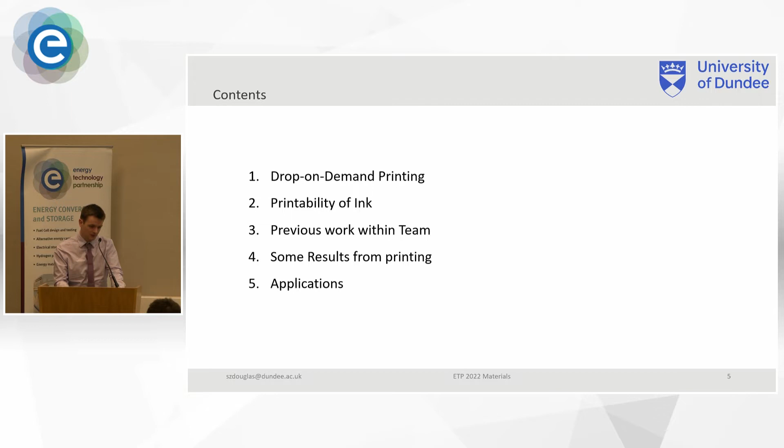It's a camera that lets us see the nozzles on the cartridge, and on the cartridge there are 16 piezoelectric nozzles. Through this camera we can see which ones are working. Some can get blocked, some can not jet correctly, so when we see the droplets, we want to make sure they're going in a straight line.

Not off at angles. We also want to make sure the velocity is within an optimized zone of about 6 to 9 meters per second, and we can change that speed by changing the voltage applied to each nozzle.

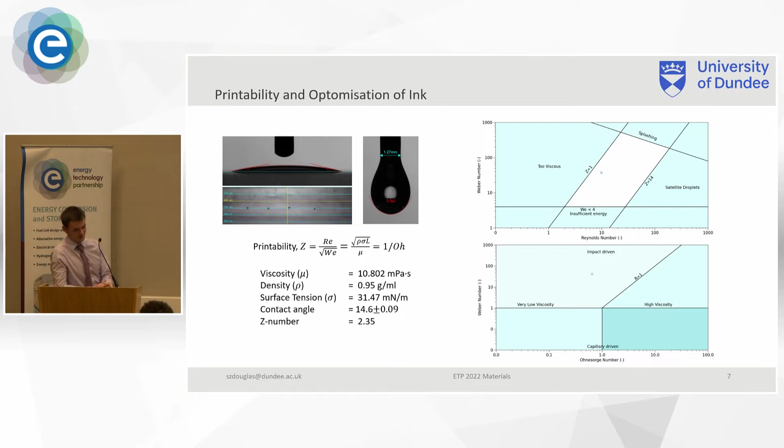This ink was previously optimized by a previous PhD student. He optimized it by creating blank inks, which is the solvent without any platinum, that behaves the exact same way. He created blank inks with different concentrations of a viscosity additive to change the viscosity of the ink, then printed it and watched what ranges of nozzle voltages you could print within, and the temperature at a single nozzle voltage to determine which concentration was the most optimum.

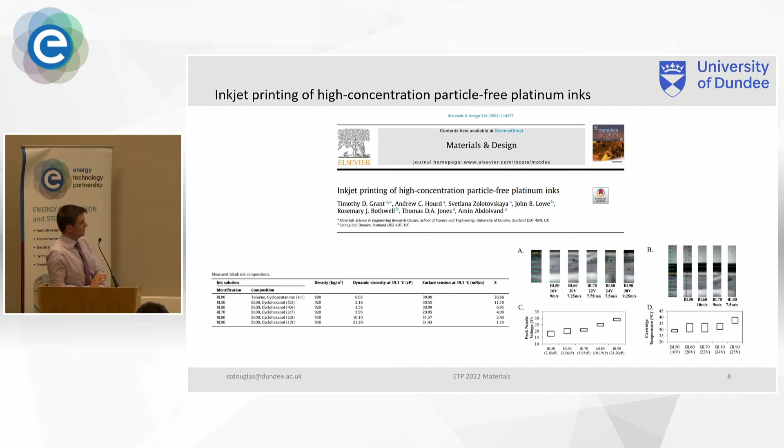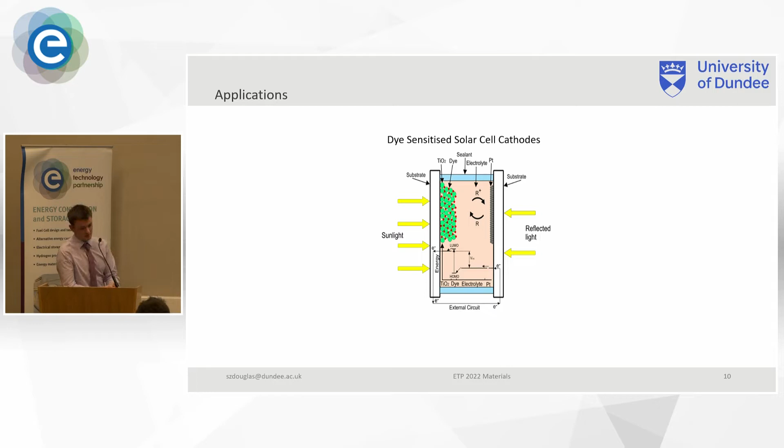The platinum acts as a catalyst to the reaction to transfer the electrons back to the electrolyte, which then reduces the oxidized dye molecules back to its original state, so we can restart the solution, the reaction, the system. So there's a few things I'm looking at with the platinum in terms of the thickness, how the thickness will affect this reaction, and also the porosity. As we saw in the previous slide, when we increase the porosity, we reduce the conductivity, but we could also potentially increase the reaction rate with the electrolyte. So it's an interesting thing I'm going to be having a look at.

I think I might have been a bit quick, but that's it. Talked a bit quicker than I thought.

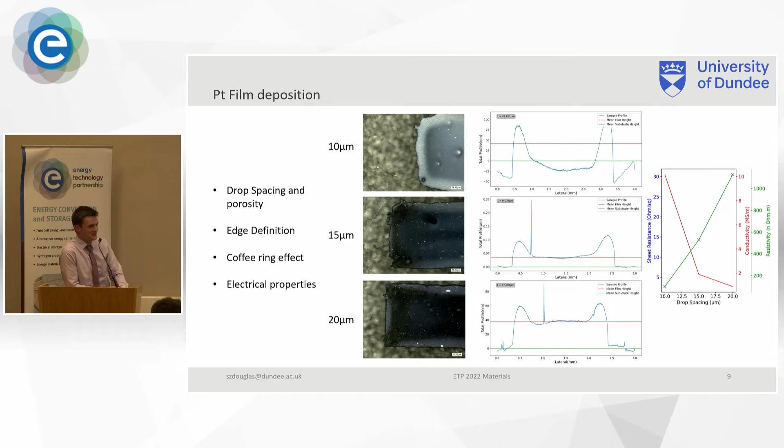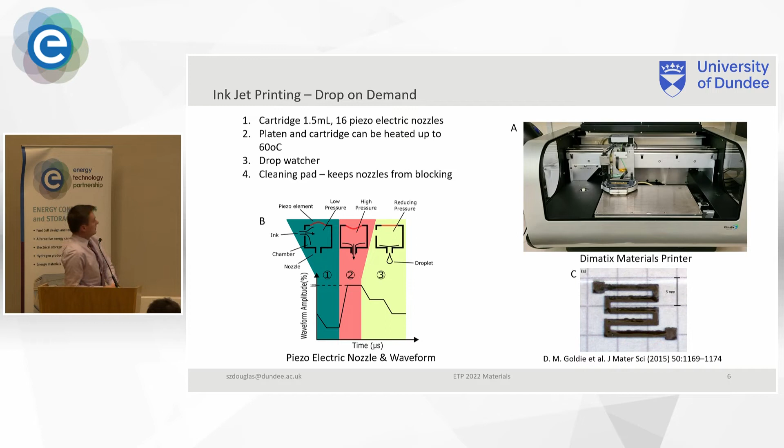You mentioned voltage and piezoelectric. What does that mean, and how are they related to print speed and droplet speed? The voltage applied to the piezo element controls the force and pressure applied to the droplet and the ink within the nozzle. In this waveform process, you reduce it to zero, creating low pressure that draws ink into the nozzle, then ramp the voltage up to 100%, set dependent on the velocity you measure afterward, which pushes the ink out at that velocity.

What happens to the piezo material when you apply a voltage across it? It relaxes, you can see like a red line. So you're changing the volume of the internal cavity, creating low pressure to draw ink in, then ramping it up to high pressure to push it out.

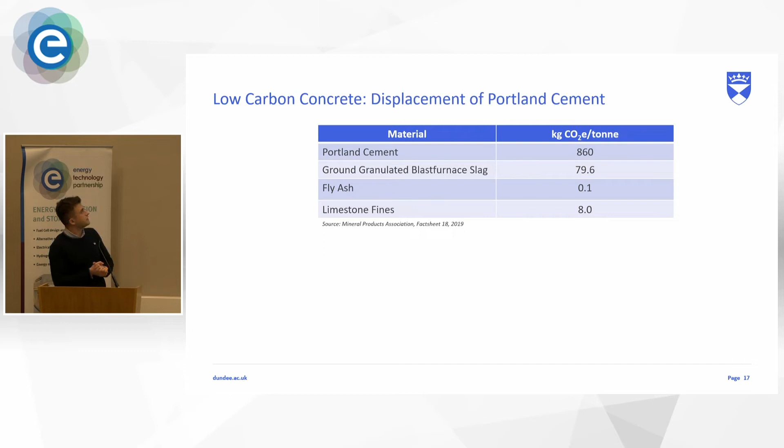Then we have low carbon alternatives of cementitious materials: ground granulated blast furnace slag, or GGBS for short, fly ash, and limestone fines, which are all essentially waste byproducts of steel production, coal-fired power stations, and limestone processing respectively. Therefore the CO2 footprint associated with these materials is quite low, because it's associated with the actual primary product rather than the waste byproduct.

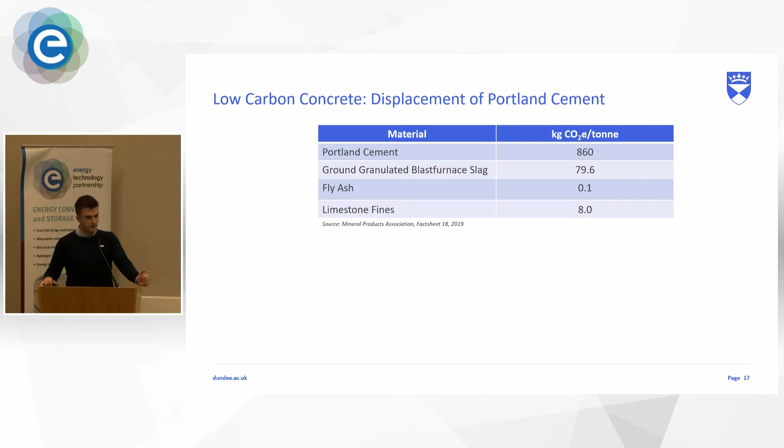But what do we consider to be a low-carbon concrete? A conventional concrete would look something like 85% Portland cement with a little addition of 15% limestone, so technically anything below 85% could be argued to be low-carbon concrete. In this project, we tried to go as low as reasonably possible without compromising performance and durability, and ended up pushing PC replacement up to 50 or even 60% with GGBS, limestone, and/or fly ash.

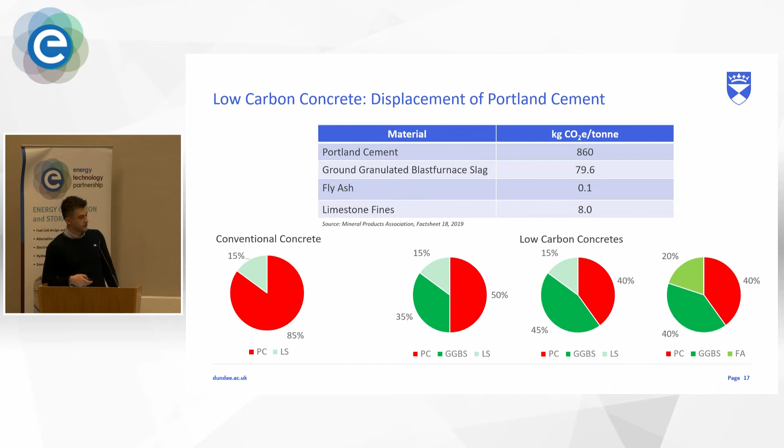In conventional concrete, after being cast, it requires at least 28 days of curing at 20 degrees Celsius to reach its full maturity.

When it comes to low-carbon concrete, as we just said, it utilizes low-carbon cement alternatives, often referred to as slowly reacting cements, due to the fact that instead of 28 days, now they need 90 days to reach full maturity. So this is particularly an issue with the so-called pre-construction concrete testing phase of a project.

When we have got a project, before we use it in situ, we have to test it in labs for particular environmental exposures. So the typical time frame would be 28 days for the sample to mature, plus the required time for the given test to be performed.

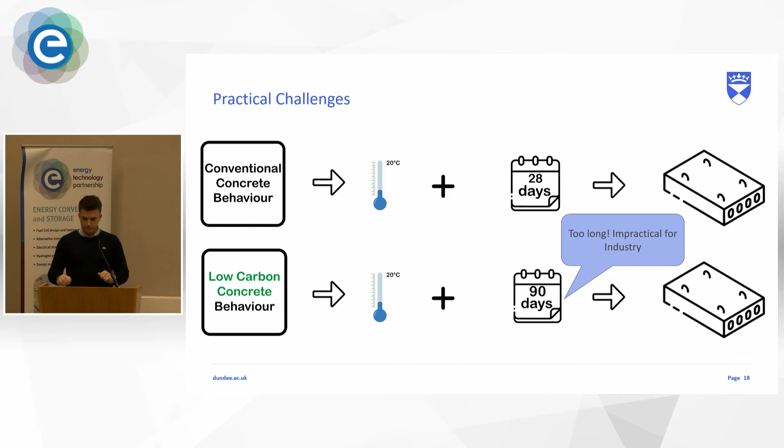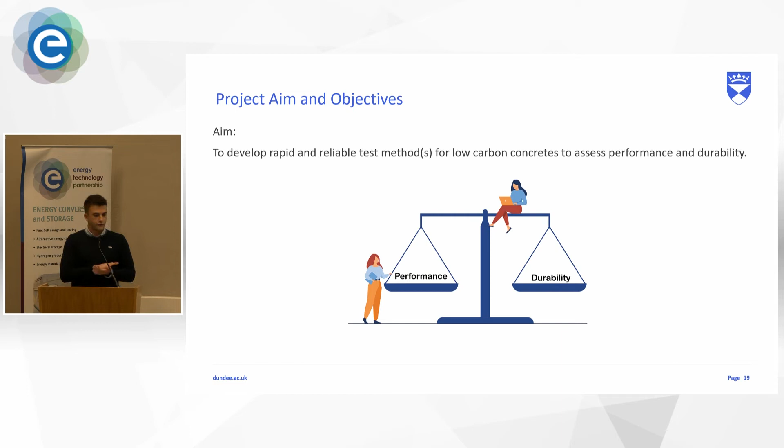So what if we came up with a method of trying to accelerate, to minimize that 90-day period to the minimum? Essentially trying to accelerate the maturity process without compromising performance or durability. That research question evolved into the aim of this project, which is to develop a rapid and reliable test method, or methods, for low-carbon concretes to assess performance and durability.

One of the ways of accelerating the maturity of concrete would be to increase the temperature of curing. This is not a new concept. Precasters have been doing that for ages. What we've done is decided to put a spin on it.

Essentially, for the first 3 days, we cured it at 20 degrees to let the initial chemical reactions happen, and then we put the samples in 50 degrees Celsius for X number of days to essentially match the strength of the 90-day standard cured samples.

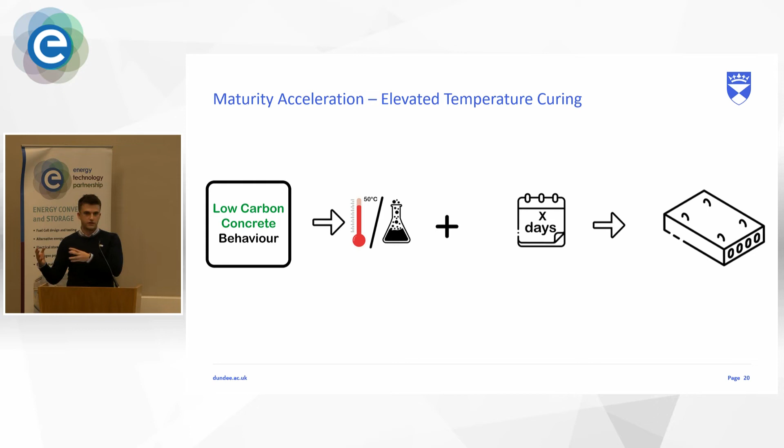So as I said before, there's a good chance that if we match the strength performance, the durability will be unchanged. So what is left to do now is compare the microstructure of the 12-day cure at 50 degrees with the 90-day standard cure at 20 degrees samples, to see whether durability matches.

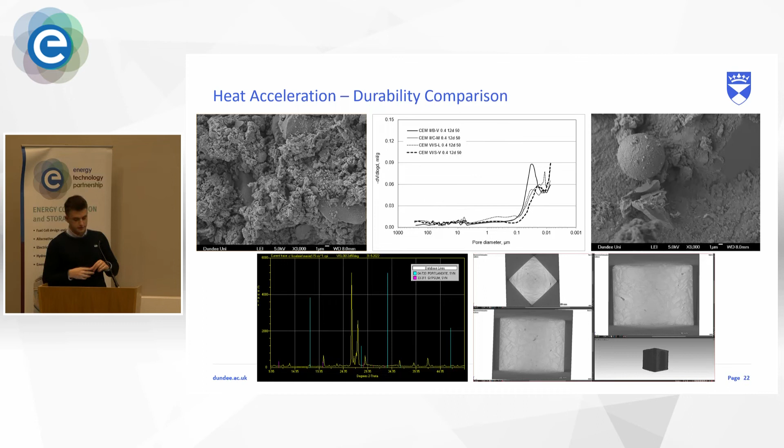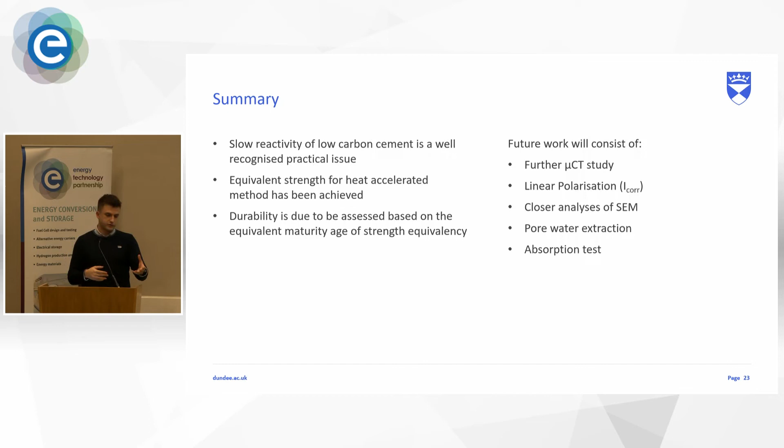To sum up, slow reactivity of low carbon cement is a well-recognized practical issue. Equivalent strength for the heat-accelerated method has been achieved, and durability is yet to be investigated further in the coming months of the project.

Are there any questions?

University of Edinburgh, and I'm researching circular economy for offshore wind, so I'm quite interested in low carbon concrete.

Are there any practical issues with having to heat the concrete? I'm thinking about offshore wind where we need huge concrete structures, and how would heating work in that scenario?

It's important to understand that we're not heating up concrete on site, we're not trying to accelerate it, because that's not the issue. These low carbon compositions I'm investigating are proven to work, and technically these compositions conform to British Standard 8500.

So with few limitations, we could technically use it to replace conventional concrete. But the problem is that before we use it on site, we have to test it in the labs beforehand, and 3 months versus 28 days is just too long for any client to wait for the project to even start.

So what I'm trying to do is limit that 90-day period to the minimum, so we can test in the labs as soon as possible and give the client the go-ahead that this composition will be sufficient for whatever they need. That's how we accelerate the overall timeline of the project, rather than waiting 90 days.